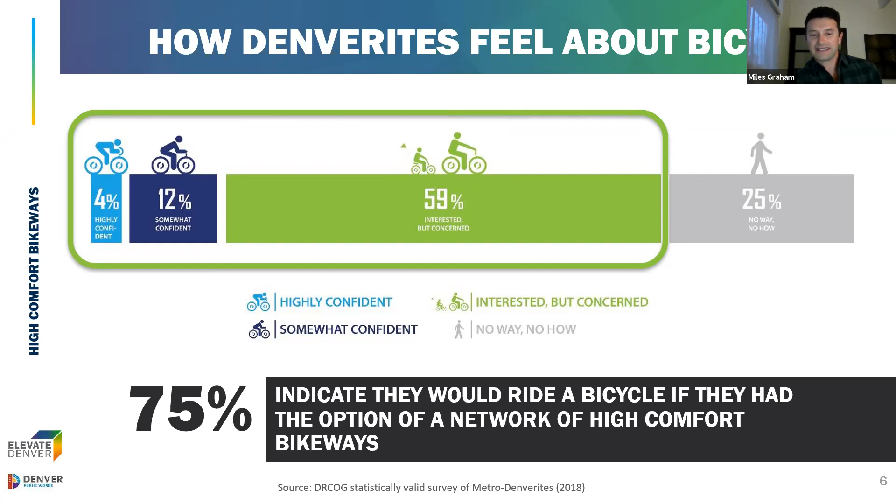Let's take a look at a bit of the why and how these types of facilities prevent risky situations that create conflicts between cyclists and other modes of transportation, particularly dooring issues and conflicts as folks are turning and parking their vehicles, providing a separated space for all roadway users that balances the right of way for folks driving, riding bikes, taking transit, walking and rolling. The benefits translate to safety, comfort, increased utilization of those facilities, and allowing people the option to have choice in how they travel the city.

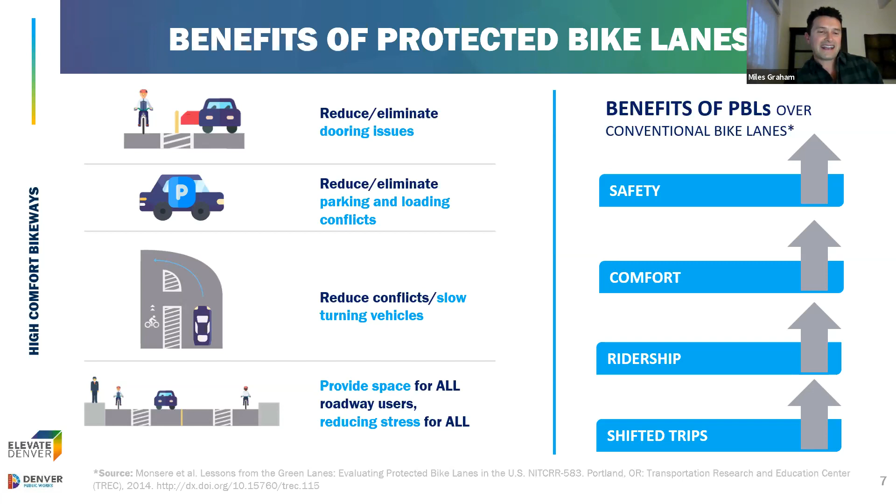Let's take a look at what we heard from the community, how it informed the design process, and how it was integrated into the final design you're going to see tonight. Throughout our conversations with the community, we heard that a concrete curb was the preferred buffer type for the parking protected bikeway, and that was the number one mobility benefit identified by the community. So in the final design, you're going to see it's a parking protected concrete curb facility.

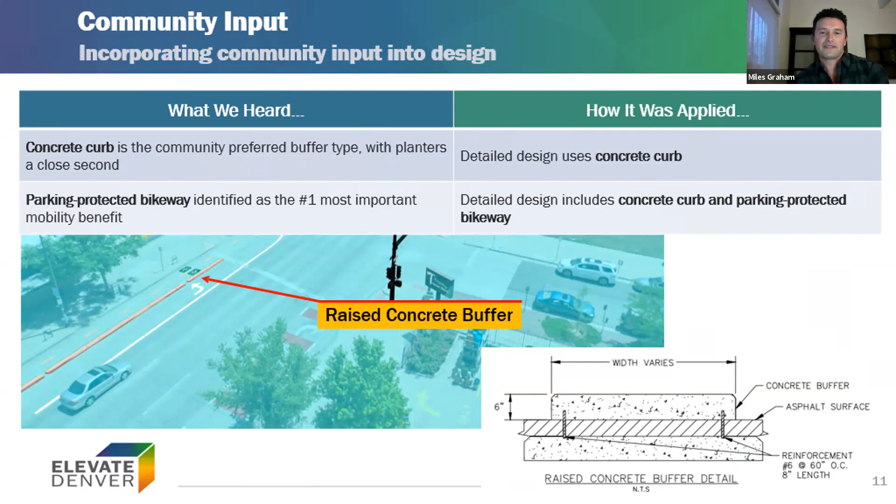We asked how the community wanted to connect to the Cherry Creek Trail, making that connection into really the bike super highway through Denver down Cherry Creek Trail and along Speer Boulevard. The community indicated a preference for connecting to Cherry Creek Trail from the Broadway Bikeway through the plaza on the south side of Cherry Creek, and that's what the design you'll see tonight will show.

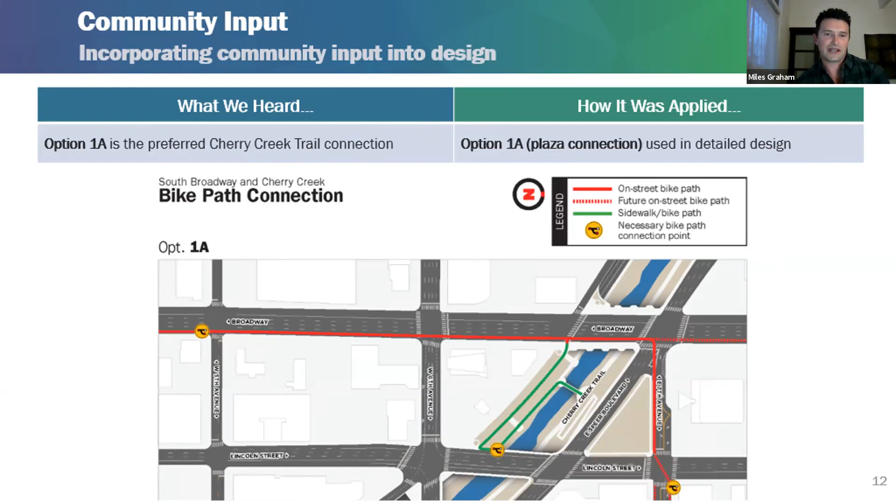Safety was a key priority for this project. In the final design, you'll see intersections that have more visibility and are opened up to improve safety. You'll also see design features like the hardened center line shown here that create a slower, more controlled turning movement, prioritizing safety for folks in the crosswalk.

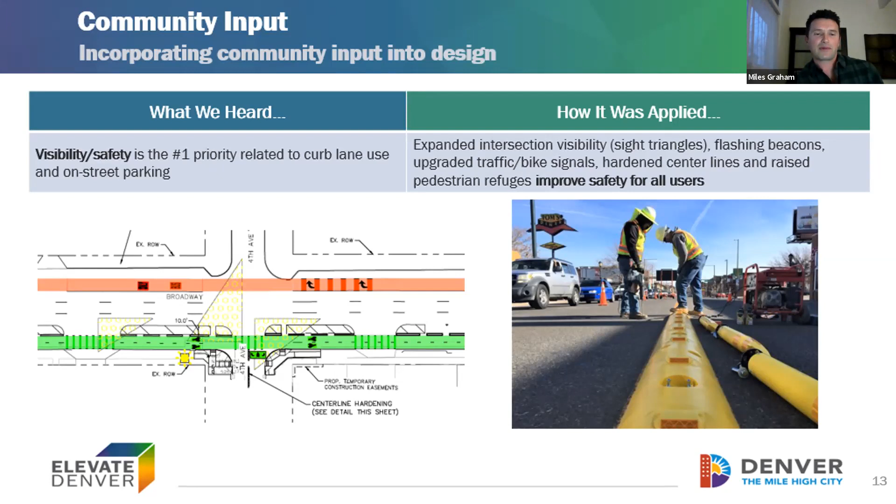You'll also see a pedestrian refuge that prioritizes safety and effectively shortens the crossing distance of Broadway. In current conditions, crossing the entire lane of Broadway can be an uncomfortable experience. With the new design, you'll be able to cross the bikeway and the parking lane, then pause before completing your journey across Broadway, making for a much shorter, more comfortable distance for all pedestrians, especially those who are differently abled.

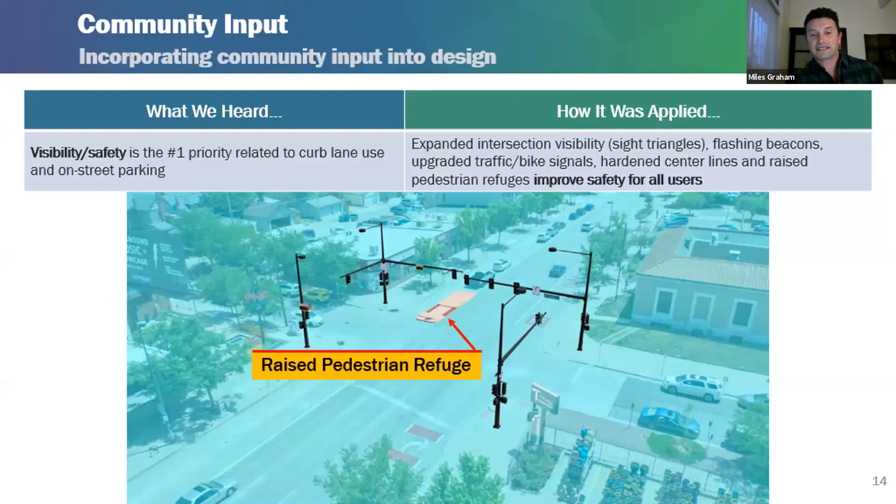All of the intersections will be reconstructed to make them fully accessible and improve accessibility for all pedestrians.

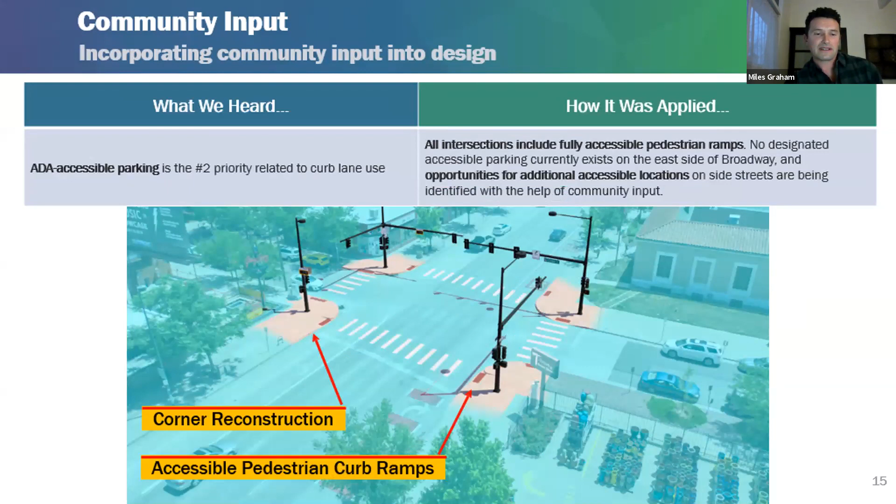We also heard that bike signals were very important, and upgrading all of the traffic signals throughout the corridor will ensure a very clear and protected turning movement for folks riding bikes, walking, and driving at all intersections.

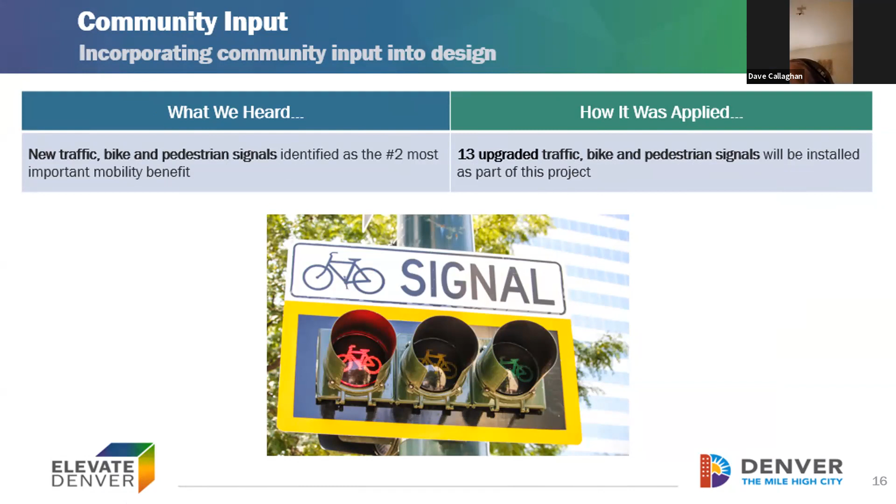You'll see how local access, which was prioritized by the community, is addressed. In future presentations tonight, you'll hear how we connect to Broadway Station, and how east-west connectivity to community transportation network projects will all tie into this facility.

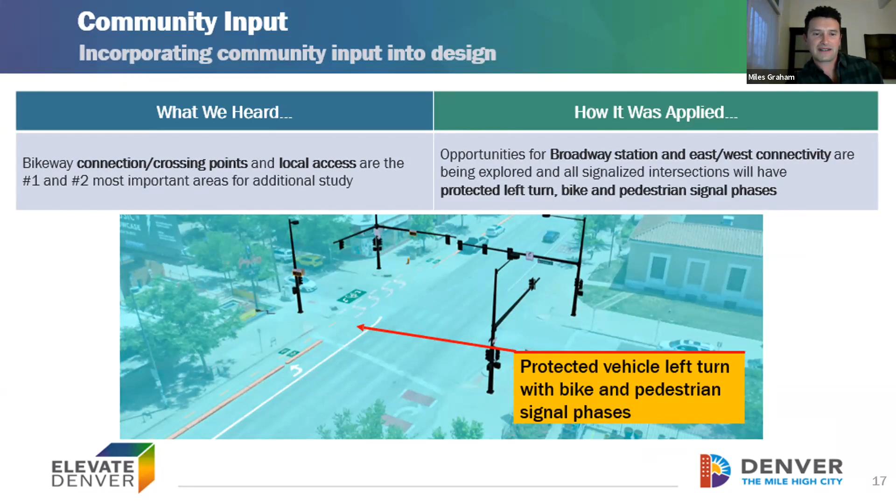On Broadway, protected left turns with those new signals will help make that intersection interaction much safer throughout the corridor.

With that, I'm going to flip it to Matt Ciarkowski to walk us through the design process.

To understand where we're going, it's important to take a quick look back at where we've been. I wanted to do a quick recap of how we've progressed from the conceptual 30% design to where we are today at 90%, approaching final plans.

When we started at 30% design, we were just getting an understanding of the corridor and looking to determine how much space we had and what we could do with it. Our goal at this phase was to determine how we could provide the best, safe, and functional corridor for all of our users.

As we progressed towards 60% design, improvements on the corridor began to take shape as we determined the specific placement and development of key project elements. At the intersections, these included preliminary traffic signal equipment locations, paving improvements like ADA curb ramps, sidewalks, bulb outs, and associated drainage improvements.

Along the corridor, it was determining what the proposed buffer type is and how that would be applied and installed in the field. Looking at curb lane use, it was determining the locations of all the loading zones, where we're looking at on-street parking, and what sight triangles are necessary to analyze to ensure safety for those spaces.

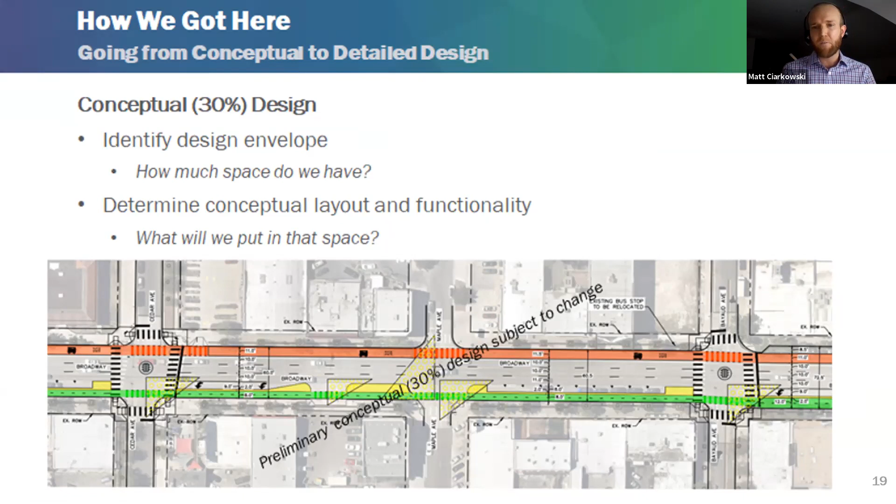As we progressed towards our 90% design, we worked through all the intricate design details of those elements and got them to a point where they're shovel-ready for construction in our plans.

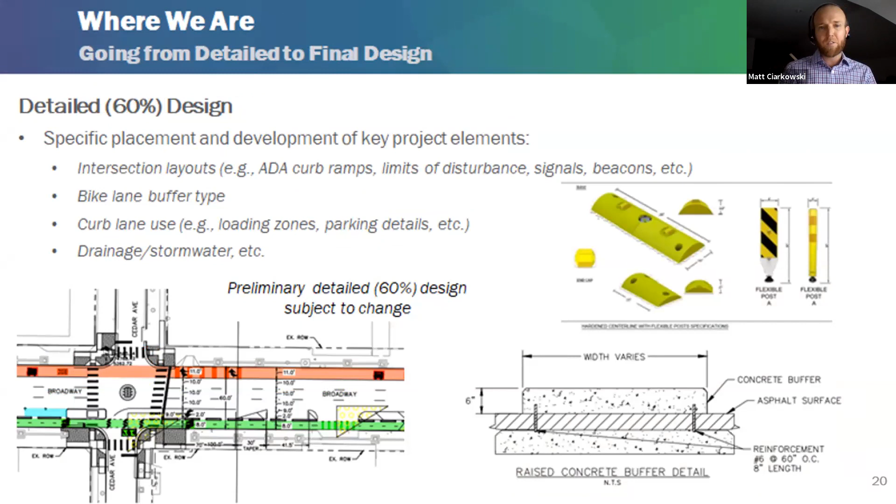From this stage through final submittal, the team will continue coordinating with the city on cost estimates, coordinating with public and private utilities as needed, and preparing for bidding and construction of the project. So let's jump forward to a couple of the key project elements we'd like to highlight.

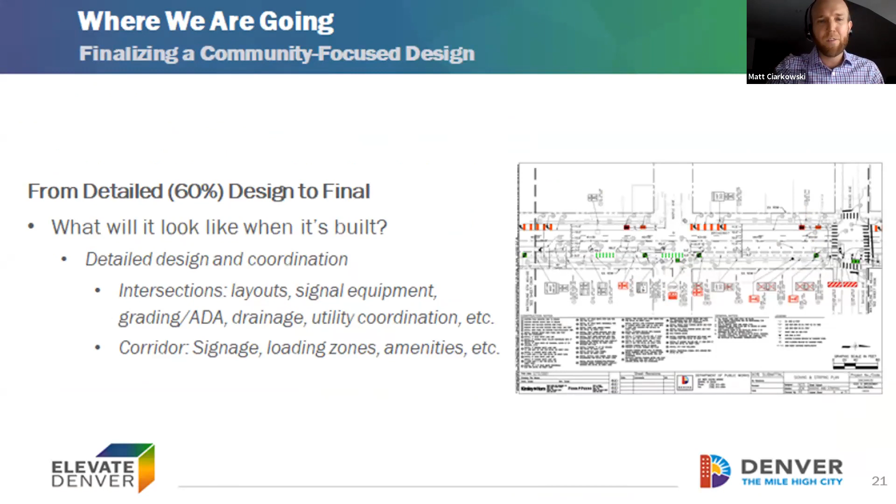As everybody knows, the corridor has a variety of context and land uses, going all the way from Center up to Speer. As we get towards the northern end of the corridor, we wanted to hone in on an area that includes some of Denver's most high-profile transportation facilities: Broadway, Speer, 6th Avenue, and the Cherry Creek Trail.

Our approach in designing this area of the corridor was to provide a safe, comfortable, easy, and intuitive connection for people walking and bicycling along Broadway, while still providing mobility for motorists going through the project area. The existing pedestrian plaza between Broadway and Lincoln will be utilized to provide a connection to the Cherry Creek Trail, as Miles referenced.

On this slide, the orange arrows represent the path that people walking to the trail will take, and the green arrows represent the path for people bicycling, separated by the pedestrian plaza there.

Wanted to also highlight the 7th Avenue connection. 7th Avenue is proposed to be a bicycle facility starting at Broadway and continuing east. The planning and design of this bicycle facility will be completed through a parallel city project called the Community Transportation Networks, which Ellen will speak about shortly. The current concept for 7th Avenue includes a two-way cycle track on the south side of 7th Avenue.

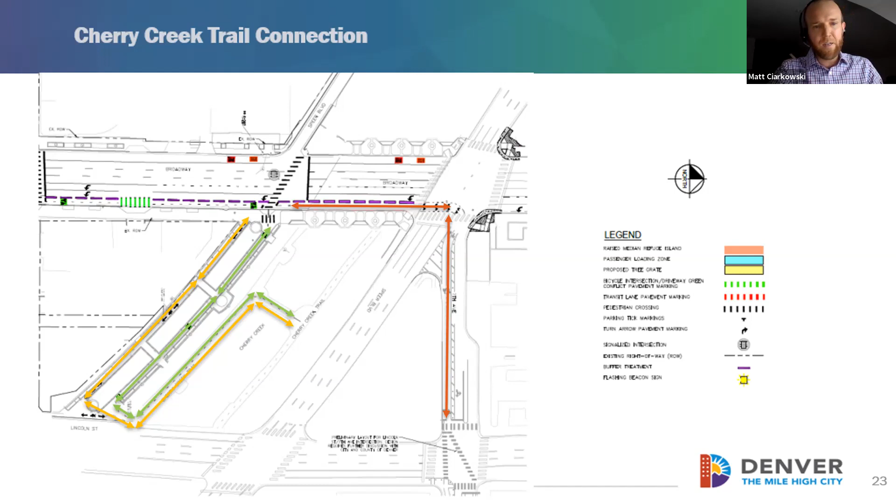This allows us to match the existing configuration of the roadway and maximize traffic flow and operations through the area. So let's jump to the next slide as we go a bit further down the corridor. We're looking here at Ellsworth and Irvington. These intersections are fairly representative of the improvements at the signalized intersections along the corridor. As we talked about earlier, each of these existing signalized intersections will be reconstructed with brand new traffic signals, paving improvements, drainage improvements, and safety improvements as well.

Most of the signalized intersections along the corridor include passenger loading zones. Throughout the project, our team reviewed the locations of all existing on-street parking and loading zones, and coordinated with the city to determine the appropriate locations of these curb uses. The proposed locations are based on safety, the context of the corridor, and an attempt to develop a pattern to help with user expectations looking for loading zones along the corridor.

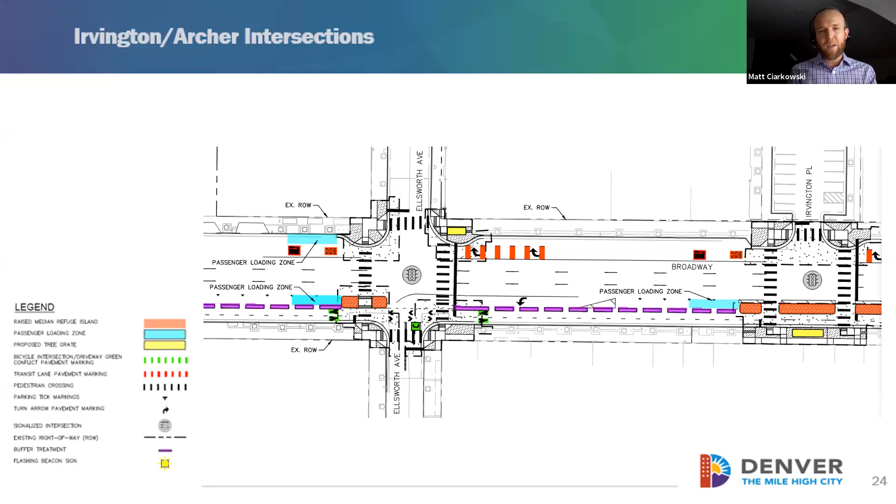The next slide jumps down to our far southern limits of the project at Center Avenue. What I really wanted to highlight here is that our team has been coordinating with our public and private partners at this area, ultimately to provide a connection to the I-25 and Broadway project, and then down to the Broadway station. Mike Harmer will talk about this a bit more in his part of the presentation.

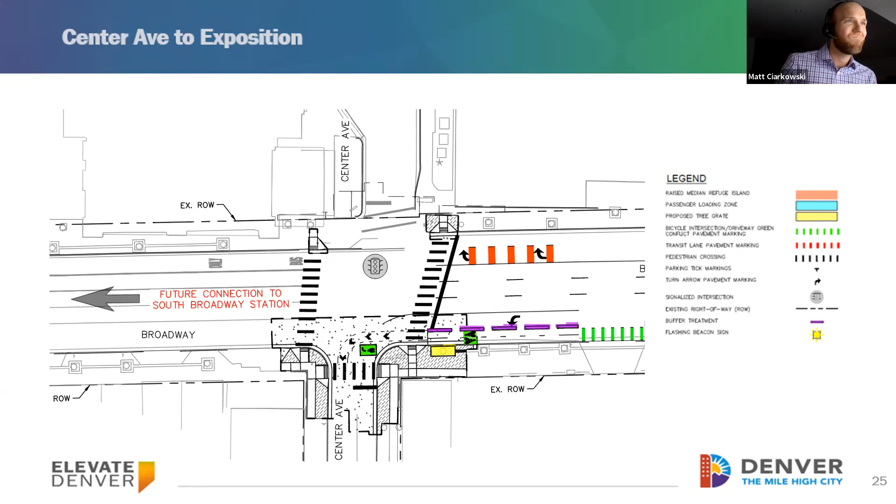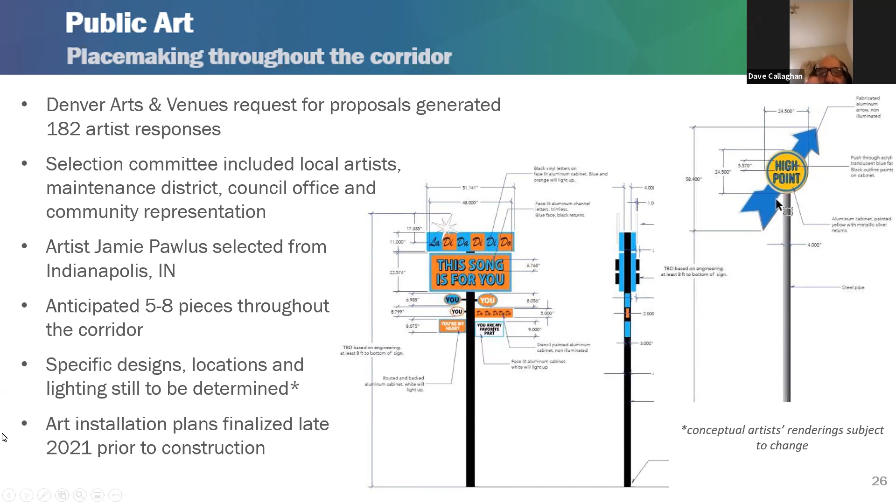Placemaking throughout the South Broadway corridor is going to be primarily through public art installations. Public art for this project is a separate but collaborative effort with our Denver Arts and Venues group, and they're underway, working together to try to time it as best they can with our construction. Obviously, we won't install any art installations until after construction, but we want to plan for it so we can reduce any rework and get any utilities or lighting figured out ahead of time.

We need it installed with South Broadway construction. So they issued an RFP for artists and got a really robust response, with 182 artists responding to the request. We had a committee of local representation that included local artists, two maintenance districts along the project corridor, the local council office, and community representation that selected Jamie Pawlus from Indianapolis, who's known for her whimsical signs, to be the artist for this project.

As far as the number of installations on the project, that's going to depend on final budget numbers and things like that. But we're anticipating somewhere between 5 and 8 different installations throughout the corridor. We're going to be working with arts and venues and the artists to find the most appropriate and safe locations along the corridor, making sure they're placed thoughtfully so they'll be highly visible and enhance the placemaking and public space for those using the corridor.

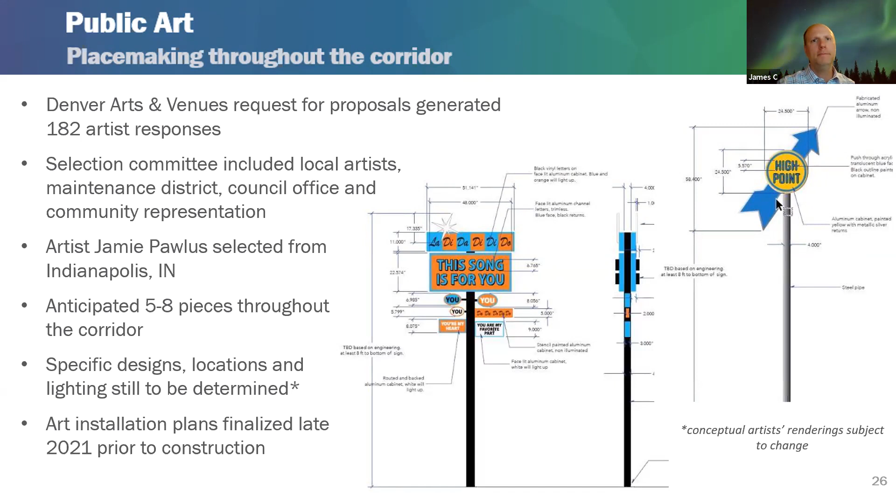Next slide. So where are we going, right? Some people mentioned before, we've been looking at this corridor for quite some time, since as early as 2015, which included our early test bikeway along Broadway. We used that to gather data and inform the programs moving forward.

Essentially that's a concept of two different programs for Broadway. First, a north segment, which would be a protected bike lane from Speer up to Civic Center Station. That project is still in the concept stage of design, and it's waiting for funding to finalize design and ultimately implement the project.

The south segment, which is the project we've been talking about, the South Broadway multimodal project, we're closing in on the final design phase right now. We anticipate having our final designs wrapped up by mid-year, in summertime. After that, we'll begin what we call our pre-construction efforts.

Pre-construction efforts essentially involve right-of-way or land acquisition, which for this project consists of acquiring temporary easements to make sidewalk and ADA connections. Broadway is an older corridor, so the land ownership isn't a pretty straight line — it jumps around a lot, so we have to get small little areas and permission to provide a smooth transition and smooth construction for our sidewalk and ADA work.

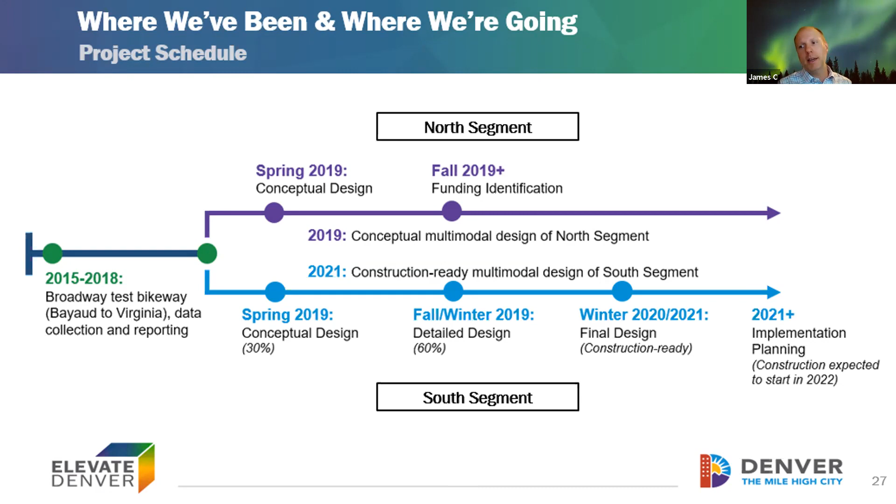Once we wrap up the pre-construction efforts, we'll go into actual construction, which we anticipate kicking off in 2022. Next slide.

If you want more information about the project, we have a project website, and we've got a bit.ly link that makes it easier for you. If you have any specific questions you might think of later or would like to ask, you can email us at denvermovesbroadway@denvergov.org, and somebody from the project team will respond to you. And with that, next slide.

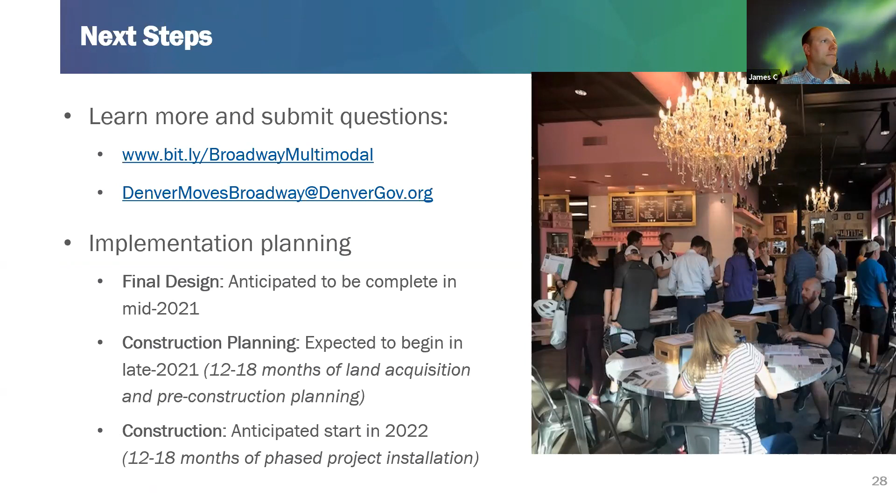We have any, now we have some. Now we're opening it up to questions, and it's 5:55 — look at that, right on the dot. That is pretty amazing. Thank you. Thank you for Broadway. So we do have tons of questions. Thank you so much for asking them. I'm going to try to hit as many as we can. Obviously we are a little bit limited at the beginning.

So several questions about the alignment, going back to the original concept design. Thankfully we have Brett here, who was also part of the design team prior to James — James is on the build side of things, Brett is on design. Larissa asked about the Broadway bike lane: why is there a two-way bikeway on a one-way street with opposing traffic, and a parked row of cars? Similarly, Rover Greer asked why not put this facility on Sherman instead. So I guess they're asking generally how Broadway was identified for this type of facility, and what is so unique about Broadway's protected bikeway that makes it the best fit. Brett, if you don't mind, or maybe somebody from Miles or the team can answer.

Sure, I'll just say first off, the protection that's going in on Broadway is probably our highest level of protection and PBL, having, as was mentioned earlier, the concrete buffer with the parking on the other side. It provides a significant buffer from that traffic.

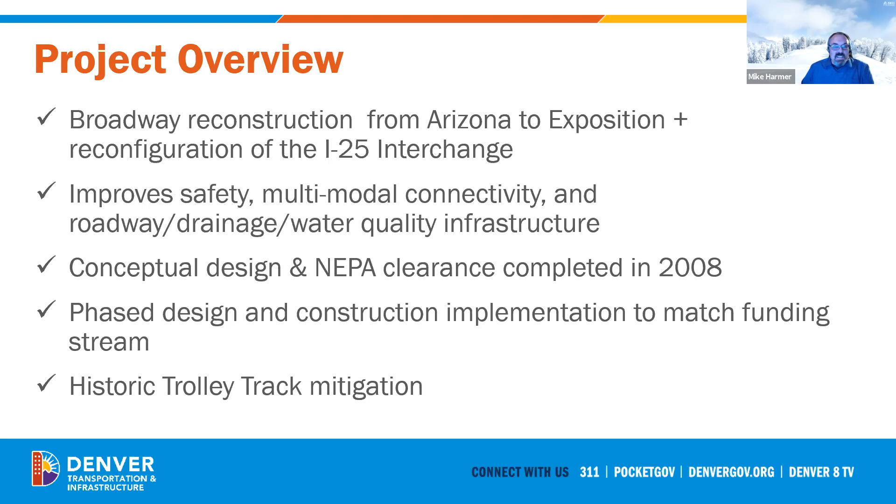With the implementation of the project, you probably heard it started back in 2008 - oh, that's a long time. Due to funding constraints, the city has been chipping away at this project for a number of years, but it's a phased implementation. Later in the presentation, you'll see a trolley track mitigation and interpretation element we're incorporating into the project.

Our goal here is to further work towards the city's goal of reducing deaths and serious injuries to zero by 2030. We're doing that by reconfiguring some of these high crash intersections, rehabilitating and improving sidewalks, upgrading curb ramps to meet ADA criteria, adding shared use paths for both bikes and peds, and finally extending the Broadway protected bikeway from Center to Exposition to connect into the network we'll be providing as part of this project.

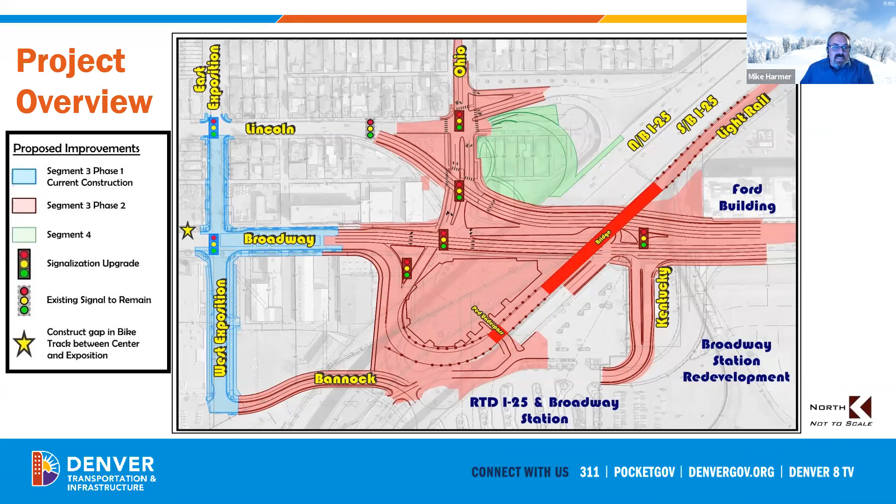With that, we're reconstructing a couple of different accesses. On the north side, that'll be via Exposition and then the Bannock leg. Second, we're consolidating Kentucky with the off-ramp intersection to eliminate one of the signals that's there that causes a lot of accidents.

The result of that is a number of different points that the public can use to access the station. On the southern end of the project, once the redevelopment of the former Gates site comes online, there will also be another connection via Market Street or Marketplace, that'll carry people through that development down to about Tennessee, where they can cross Broadway and connect to a regional trail.

This is a schedule that illustrates where we've been and where we're going. As I mentioned before, the EA was completed back in 2008. Then we moved on and completed segment 1 and segment 2 of the project, which was Broadway from Kentucky to Arizona and the Mississippi stretch.

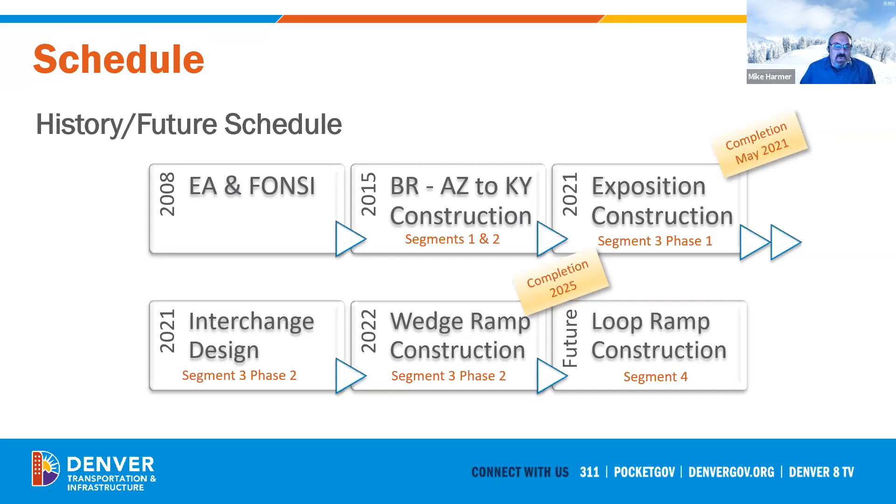Earlier this year, we awarded the Exposition Avenue construction, which is due to be done in May. This year, we plan on finishing up the design of the salmon color, or the interchange area, and we anticipate construction to occur sometime in 2022, with an anticipated completion in 2025.

Here are just a few pictures of the construction that's ongoing right now. These are pictures of East Exposition between Broadway and Lincoln. It shows pictures of the roadway reconstruction - it's gone from asphalt to concrete. We've also reconstructed a number of the sidewalks and pedestrian ramps in the area.

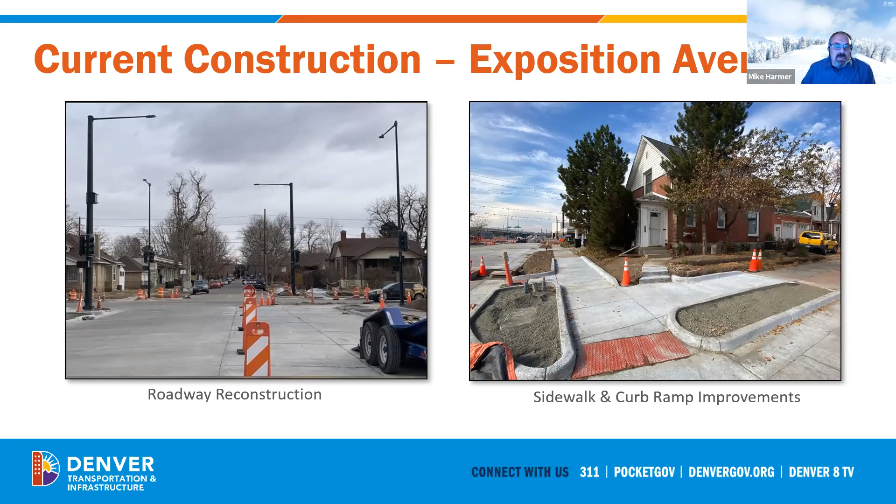The project is constructing storm sewer infrastructure, putting in new signals at both the Broadway and Lincoln intersections with Exposition, and installing some street side stormwater planters to improve water quality.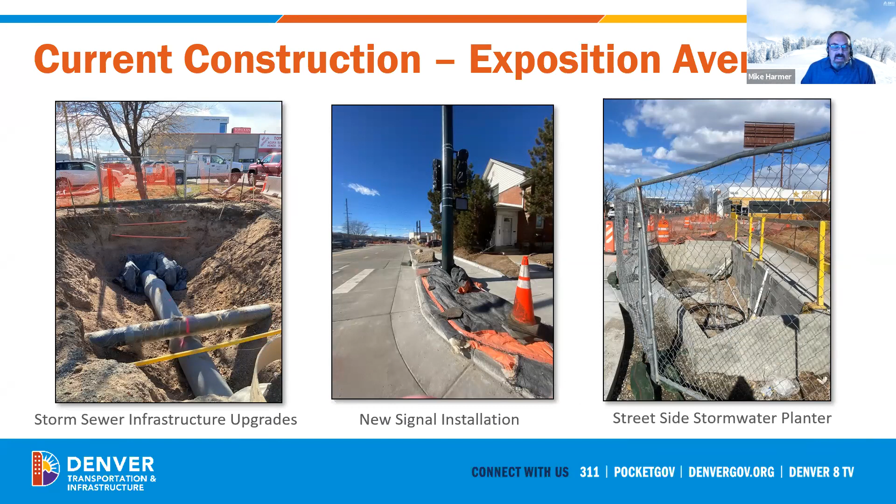What really isn't shown clear on here are the multitude of pedestrian and bike paths that we're providing with the project.

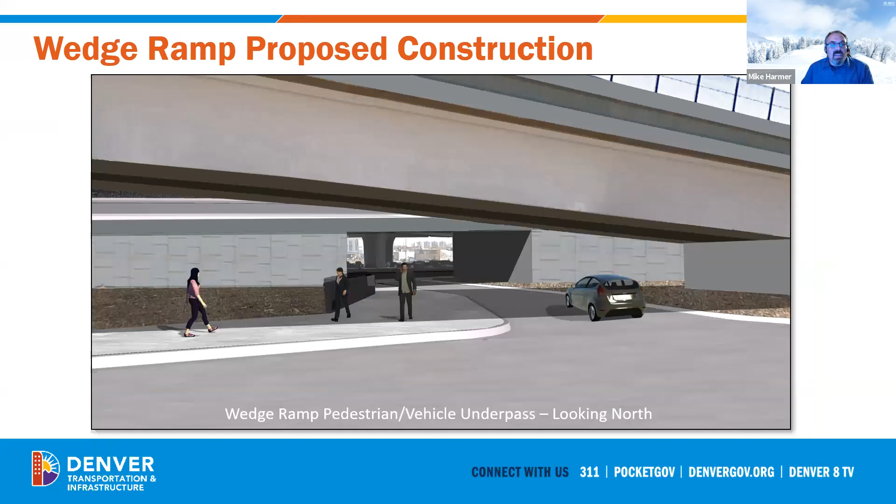The next slide will show the view from the other direction.

I mentioned briefly that one of the things we're doing as part of the project is installing a historic mitigation element, incorporating that into the project. This element has to give site-specific references to the transportation history of the corridor, and incorporate that into a higher traffic area that will engage people more than just a sign.

Many of you have probably been at the Broadway and I-25 station. On the southern end of the platform, there is an existing sign that characterizes some historic items, and I'm not sure that gets a whole lot of attention anymore.

So what are we planning on doing? What's presented here is the site concept. The plan is, at the intersection of a couple of the wider walkways, to install a textured sidewalk that inlays brick pavers to mimic the old trolley lines. That's what you see by these lines in the center of the sidewalk.

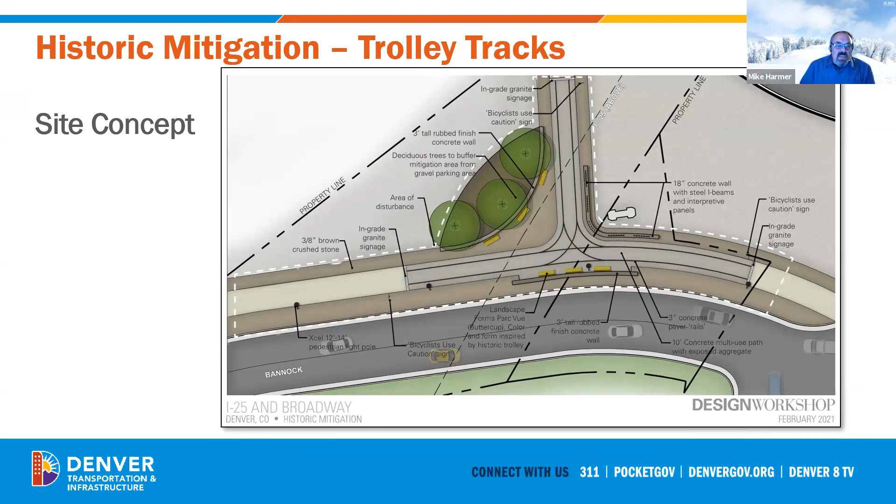Let's go to the next slide, which will give you more of a 3D rendering of what that is anticipated to look like. It will include interpretive signage discussing the relevance of the historic trolley, not just the tracks, how they contributed to the area, how they moved people and goods around, and how it provided access to the former Gates rubber plant site a long time ago.

It'll look like more of a plaza area where people can sit and congregate. There's benches, small walls, and additional pedestrian scale lighting for safety. So that's what we're planning on moving forward with in the design.

This is another rendering, more of a close-up view of some of the signs, the interpretive elements. Largely they're panels on top of I-beams with nearby seating.

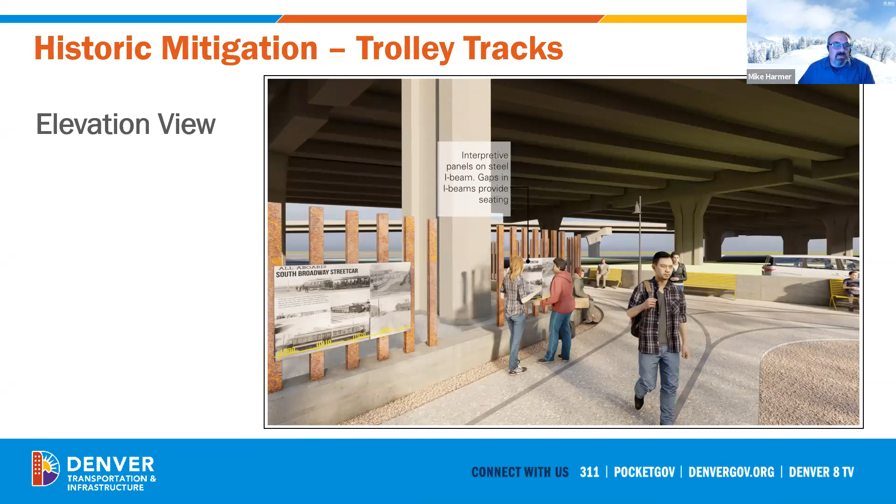So with that, I thought I'd see if you guys have any questions. I think I'm just under my time - there you go. Look at this, I am loving this team. We were a little concerned that we were not going to have enough time.

Yes Mr. Mike, we do have several questions for you. First, from John: what is the total price tag on the interchange project? The total cost of the interchange, given that it's a phased implementation, is hard to give a specific number. As mentioned before, construction of the entire project began basically in 2015. Overall, it's probably in the range of $100 million.

That obviously includes local funding, state, and federal funding, correct? That is correct. The city has been successful in obtaining a number of grants through DRCOG. Those monies come from FHWA in terms of a federal grant. Those grants are project specific and were awarded based upon a competitive process.

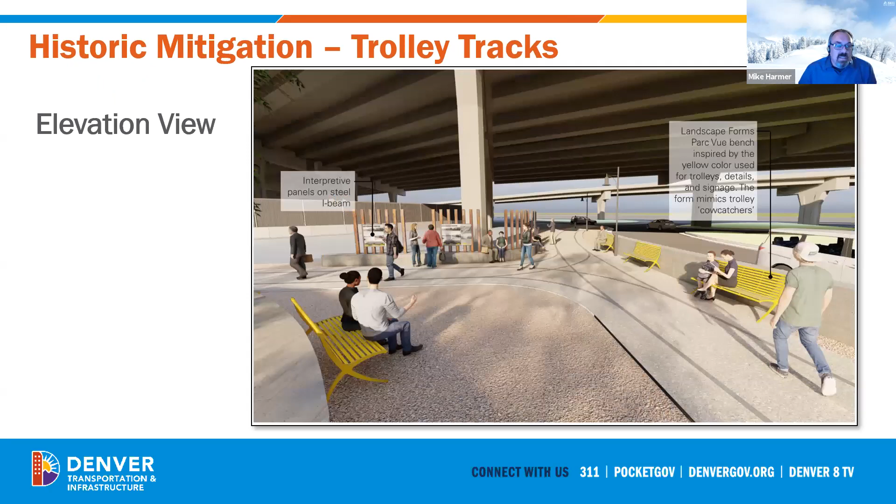If we don't mind going back a few slides, so we can show... Yeah, it's probably back about five slides, one of the maps, the overall map. That one, right? Yeah, that is it. This is an area that's still under development. What you see here are the improvements largely associated with the Salmon Color project, or phase 2. We do plan on widening the facilities on the north side of Ohio.

Once the final phase of the project comes in, you'll see even more connectivity for bikes and pedestrians. One of the things we're doing at this location, as many of you probably know, is that the existing Ohio and Lincoln intersection is currently unsignalized. We're putting in a signal which will make it safer and easier for peds and bikes to cross.

But this intersection will continue to evolve over time. In this slide, there's a lot of discussion, as expected, about the green area, segment 4 - that's the 800 block. Can you share with everybody the status of segment 4? And go over what the original EA called for in segment 4, and the general status, Mike.

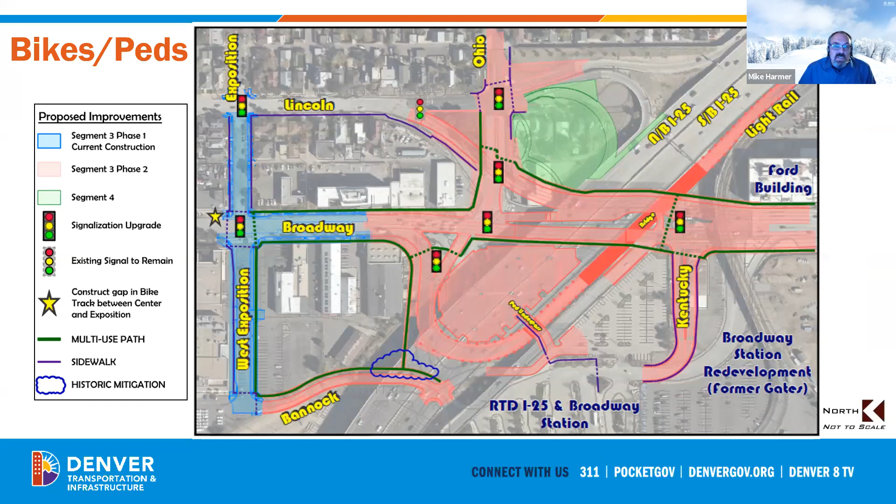We certainly still have questions and comments in the chat, but let's kick it off now to our Lincoln Transit team, so folks can see how these improvements help transit on the other side. Brett and Zack, if you don't mind taking it over.

Sure, I'll kick it off and Brett will come in at various points throughout the presentation. So this project - the boundary of this project is shown here on the map. It's from Ohio to about Speer or 6th, shown to 7th here. That's where the bus lanes merge in, or become the 24-hour bus lanes that are present north of Speer, out of Speer Boulevard. So that's the bounds of this project on Lincoln.

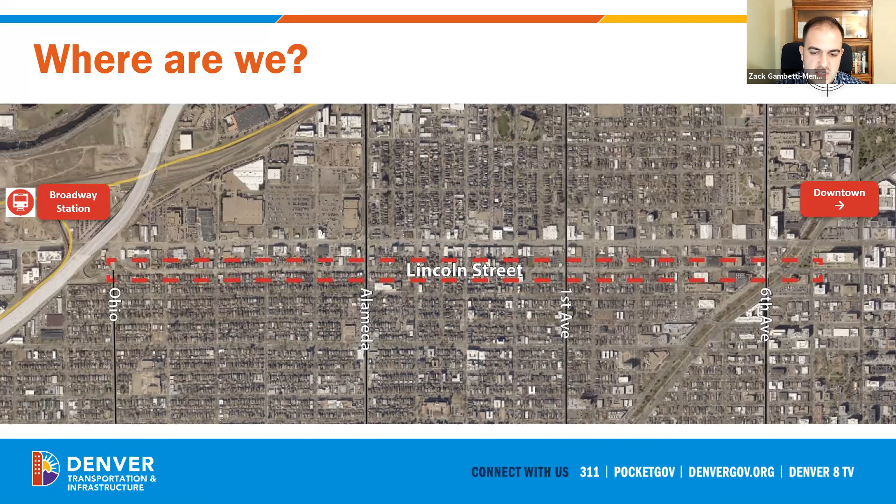Next slide, please. These next few slides just set the stage for where the project has been, and also set the stage for how the proposal - excuse me, I'm stumbling over my words.

How the proposed alternative came to be based on these factors. We heard a lot from the community about there being safety issues on the corridor. It doesn't feel safe to walk along Lincoln. Cars are going super fast.

This is just an image of the crashes along the corridor. This represents hundreds of crashes over the last couple of years. It's only a data point, but we have a lot more data from you all, plus speed data, that shows this is a dangerous corridor. Additionally, Lincoln north of Alameda is on our high injury network, so it's one of the 5% of streets in Denver that has over 50% of our traffic injuries and deaths.

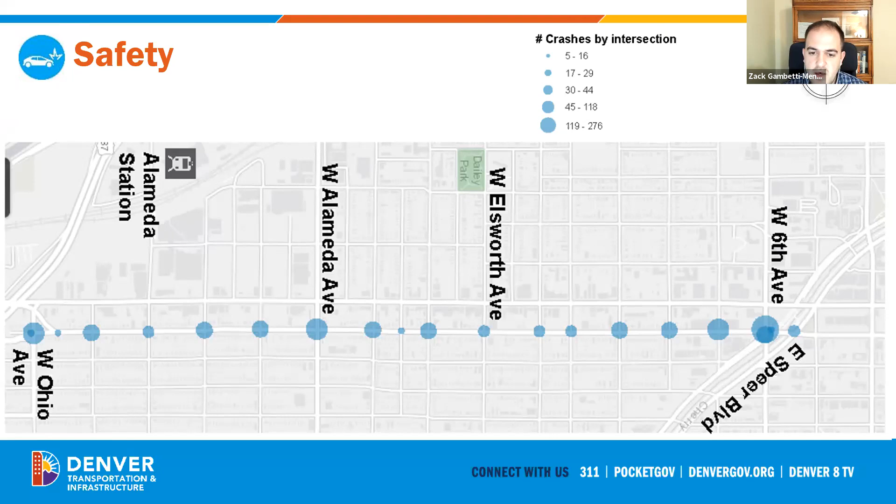Transit along this corridor: Lincoln and Broadway act as one corridor since they're both one-ways. It's the third most used transit corridor in Denver. This may remain true today, I don't know if it's still third, but it may potentially be, because I don't know if anyone has ridden the Zero lately. There's a lot of folks on it, so much so that I think this is one of the corridors RTD has actually been increasing service on through COVID.

They've also brought the larger articulated buses to serve the demand along this corridor. So even now, when we're hearing that transit service is down, this corridor is still moving quite a good number of people. And the important thing on this slide too is the delays the buses are seeing - upwards of 35% of their time along this stretch of Lincoln is spent stuck in congestion. That's primarily in those afternoon rush hours when the bus-only lanes are not active.

This slide will come into play when we talk about what we're doing on the corridor, but the main takeaway is just to notice this is the vehicle traffic along the corridor - very peaky. You see these spikes in the morning rush hour period and afternoon rush hour period throughout the week. Saturday is kind of just a blob of traffic throughout the day, as is Sunday, but not as high. Those peaks are really key because that's when the buses are getting stuck.

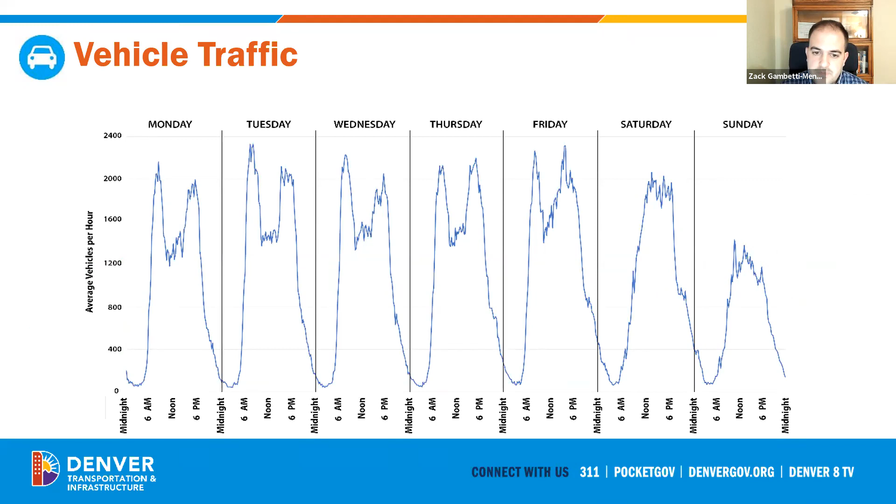Existing conditions with parking, and this will come back at the end - currently there's no spaces on the west side. There's approximately 247 spaces on the east side of the street between Ohio and 6th Avenue, available 22 hours a day on weekdays, 24 hours a day on weekends. The only time you're not allowed to park there is 7 a.m. to 9 a.m. when the bus-only lane is active.

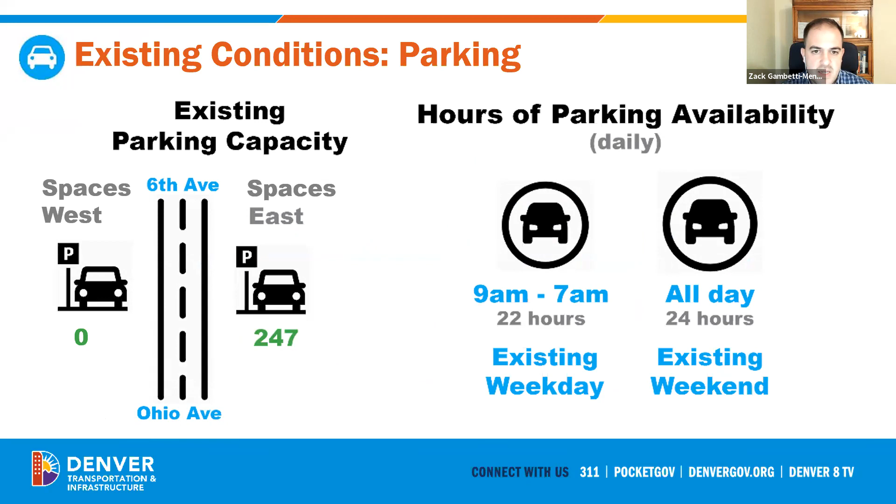So what did we do with all of that information and all of the community input we received? We'll start with talking about the safety improvements coming to the corridor, and Brett will go over those, and then I'll talk about how the street operation is changing and how that impacts transit, traffic, and parking.

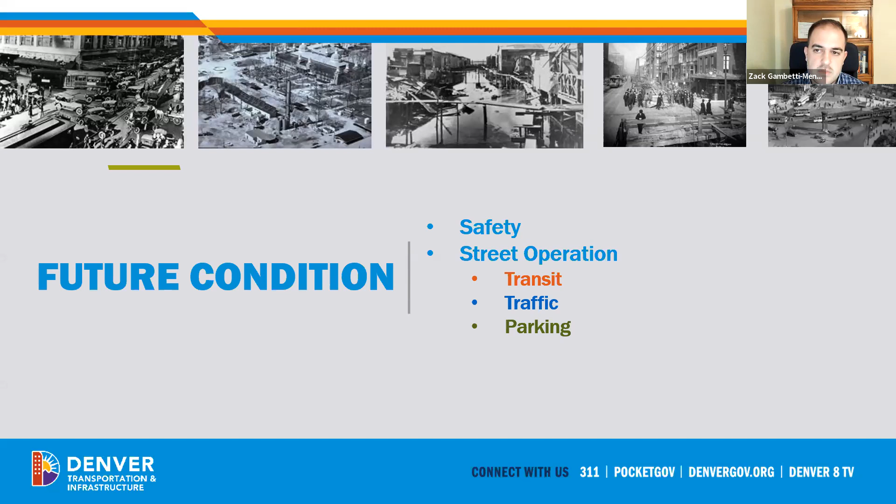Thanks, Zach. As Zach mentioned, we took the opportunity to evaluate and design some lower cost Vision Zero improvements that could be installed with the transit improvements, which Zach will talk about in a moment. These improvements were determined as a direct result of our crash data analysis, a Vision Zero walk audit that the team conducted, and the community feedback we heard from you all.

As a reminder, the public input we received really highlighted the speeding vehicles seen along Lincoln, which leads to that highway feel through the neighborhood that we've heard a lot about. We also heard that it feels dangerous to walk along and across Lincoln due to those high speeds and the close sidewalk proximity to speeding vehicles.

So I want to get into the details of some of those projects that will improve safety along the corridor. They're in 9 general categories of improvement that I'll whip through decently quick - I apologize, it's going to get a little technical, but we get really excited about these things, so hopefully this will give a good understanding of what we're doing.

Firstly, we have 2 traffic signals being installed along the corridor beginning this year, at the Exposition and 5th Avenue intersections. These will include updated signal infrastructure, safe pedestrian crossings, and better visibility for all modes.

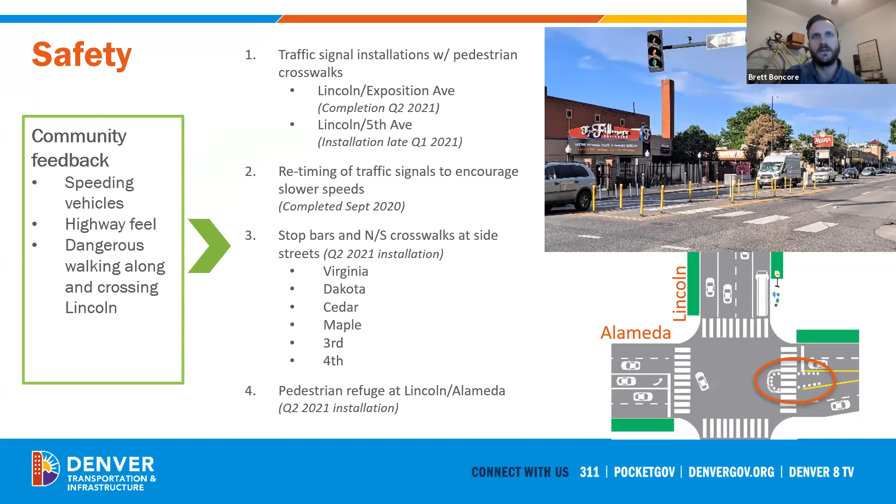At 3 locations on the corridor, we saw a need for daylighting, which means removing some parking spots near the corners to better establish visibility for all intersection users, whether turning or crossing motorists, people walking, biking, or rolling. In some cases this allows more space for motorist turning movements, like at Cedar Avenue, where we're daylighting the intersection to provide more space for the RTD Route 3 to make its left turn.

There are 4 intersections along the corridor where we saw current or developing bike and pedestrian safety issues. At Dakota and 4th Ave, we're actually evaluating traffic signals long term, and we'll be installing painted bulb outs to encourage slower turning speeds and improve safety for all users. An example is shown in the photo on the top right - this is also a Vision Zero project we did on Colfax recently.

At 2 of these locations, Virginia and Ellsworth, we'll be installing painted bulb outs and hardened center lines. These hardened center lines, shown at the bottom, are from a photo in New York. They further encourage slower left turns and help mitigate pedestrian and bike versus left turn motorist crashes. Some of these will also be installed on the Broadway cycle track.

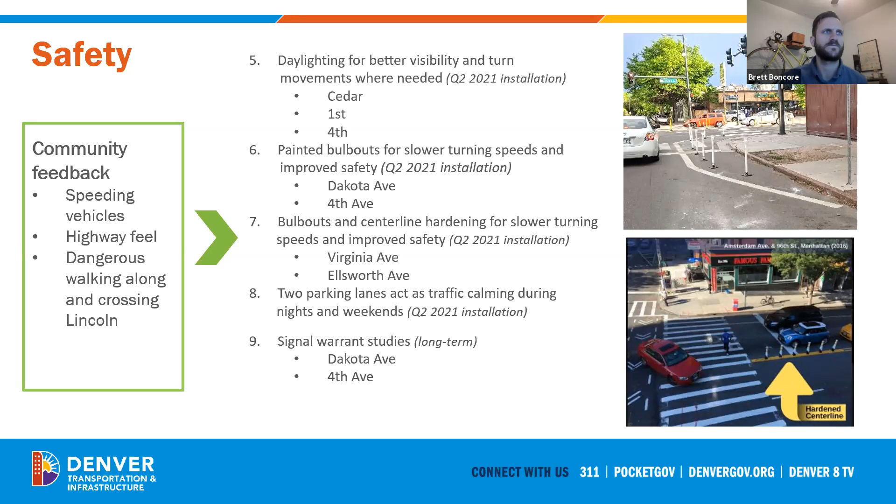I'll turn it back over to Zach to chat more about the street operations. Thanks, Brett. So now we'll talk through the street operations, the changes coming for transit, traffic, and parking. We wanted to lead with safety because that was the biggest piece we heard during our community feedback. This started with needing to get the buses unstuck in those afternoon periods, but we were able to incorporate a lot of safety improvements that I think will be a great addition to this project.

But now for these other pieces of the project, I'll show some of the community feedback we heard, how we turned those into solutions, bringing in the data we talked about earlier, and then we'll walk through what the corridor will look like during the day.

In terms of transit, we heard a dichotomy: we don't need a 24-hour bus lane. Most folks who said that still understood the need for expanding the bus-only lane hours, suggesting peak only or just the middle of the day. There were almost an equal number of folks wanting a 24-hour bus lane, feeling it was needed on Lincoln just like it currently is on Broadway. But there was pretty clear consensus that it not be a 7-day condition.

When we started this outreach, we were just presenting ideas as 7-day conditions. Based on this feedback, we're now doing a peak hour bus only lane, from 6 a.m. to 9 a.m., in line with what currently occurs on the corridor, and then again from 3 p.m. to 7 p.m., when we see the biggest delay in the afternoon peak. It will be weekdays only -- traffic conditions and service levels didn't warrant blocking that easternmost lane for buses only on weekends.

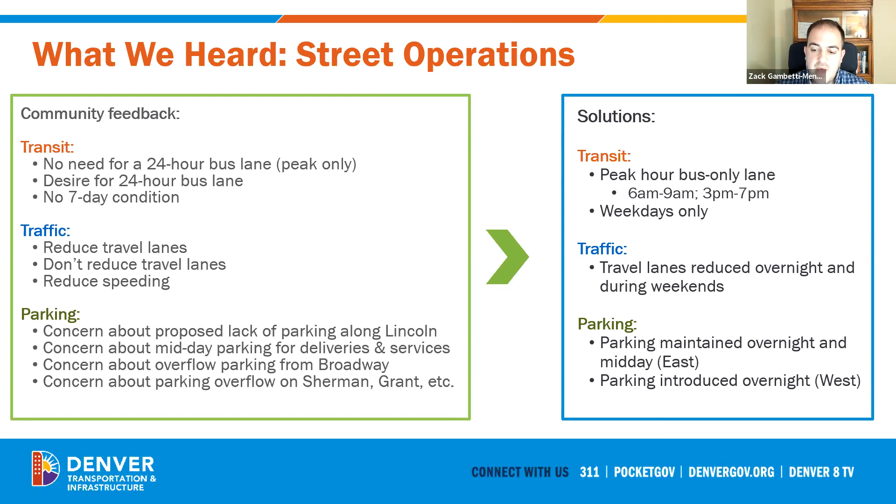We're also going to introduce parking on the west side overnight. That's where the visual narrowing comes in during those overnight conditions and over the weekends, to have that buffer and reduce the crossing distance when there's parking on both sides.

Next slide. So now this is how the street will operate through the day. The solutions on the right-hand side of the screen are the same that we just walked through. In the AM peak period, 6 a.m. to 9 a.m., this is how the corridor currently functions: 3 drive lanes and a bus only lane.

Once 9 a.m. hits, next slide please, that bus only lane turns into a parking lane -- the same condition you're all pretty familiar with currently on the corridor. Through the midday period, once 3 p.m. hits, next slide, that parking lane becomes a bus only lane again. We'll have right-of-way enforcement clear any cars parked there so the buses can start moving at 3 p.m.

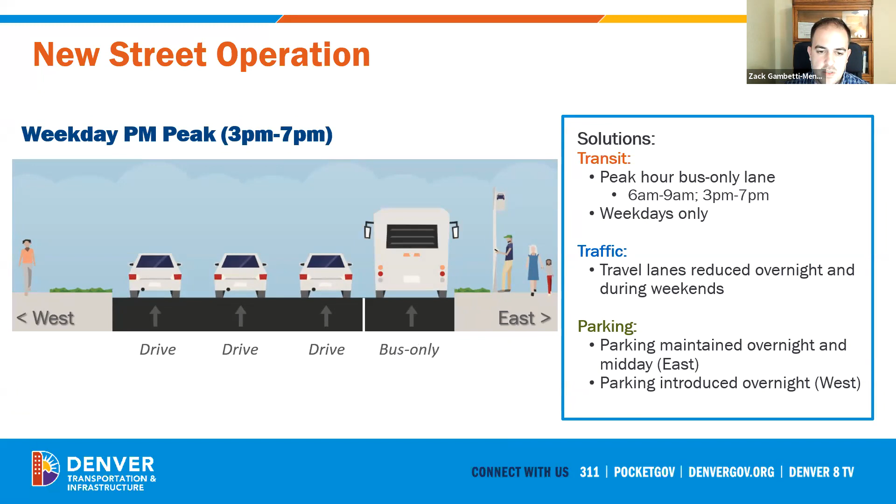Next slide. Overnight, you see both lanes on both ends switch back and forth. So that drive lane on the west side going forward turns into a parking lane, as does that east side bus lane. So then there's 2 drive lanes in the middle, with a buffer of parking on either side.

And that condition remains the same over the weekends as well. The weekend condition would begin at 7 p.m. on Friday when the bus lane ends, through 6 a.m. Monday morning when the bus lane starts again.

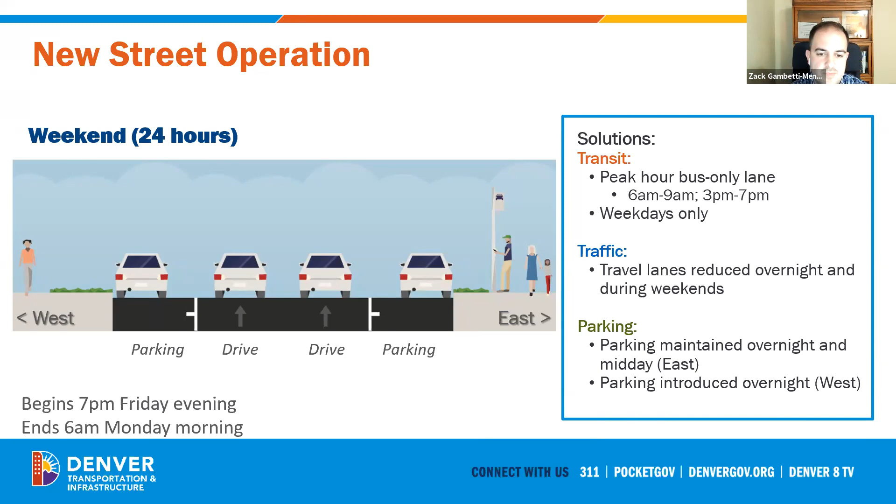So what does all this do? It increases our transit-only lane hours by 250%, from 10 hours to 35 hours, getting those buses through in their most congested periods. And it does add parking to the corridor, which many folks were concerned about - about a 92% increase in parking. There's just a few less spaces available on that west side than there currently are on the east side. To Brett's conversation about safety earlier, I think 11 intersections are improved, so that's pretty great.

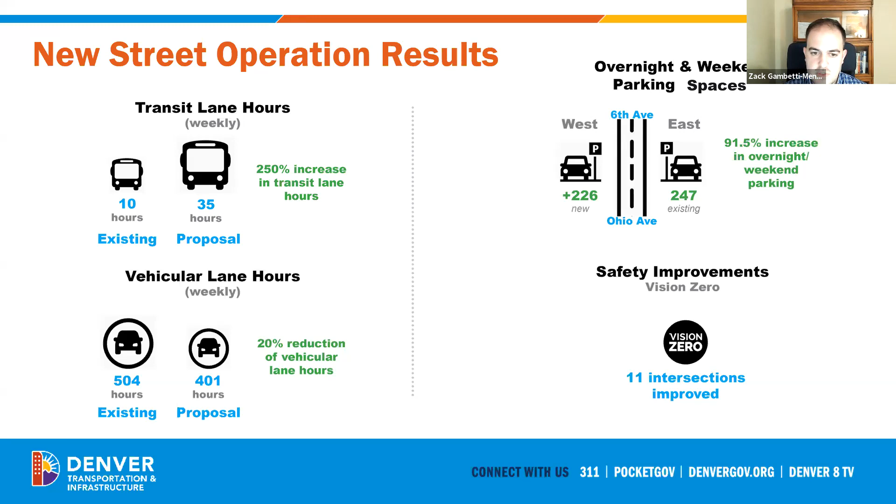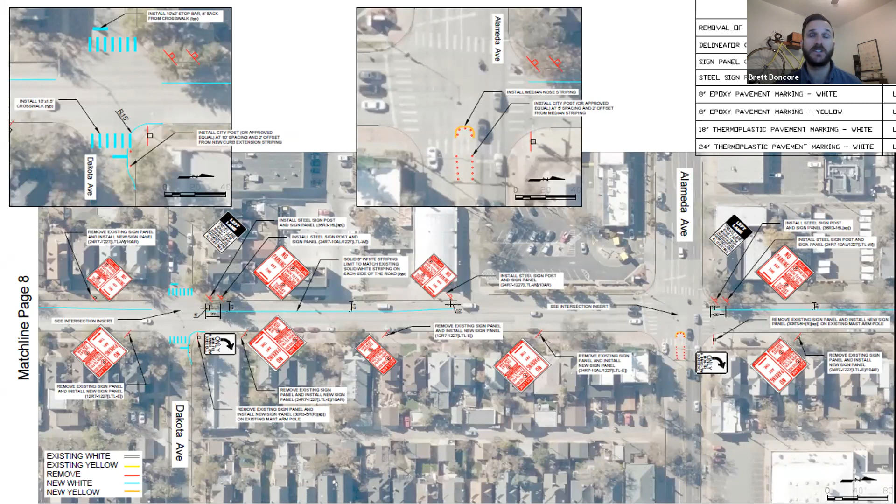Oh Brett, this is you. Yeah, so this slide, you don't worry about reading this slide, it's a little detailed - this is the nitty-gritty detailed design. I have this up here just to say we're in the home stretch. Detailed design has been done, which we used in-house staff to do, a little uncommon for these types of projects. But we've wrapped that up, and we're now procuring construction. Definitely pleased to report that.

We can go to the next slide. That kind of shows a timeline of where we've been and where we are. Zach went through a lot of this, so yeah, we're in the implementation phase. Right now we're moving this forward to construction.

We are literally in the process of contracting or procuring a contractor to make this happen. So we're thinking, depending on weather and some nitty-gritty administrative stuff in the background, spring or summer of this year is when we'll be constructing this.

Those of you who live along the corridor should have probably already started seeing construction notifications. During construction, you can expect some minor disruption in travel near the construction zone, but these disruptions will be communicated beforehand to make sure everyone's aware of that.

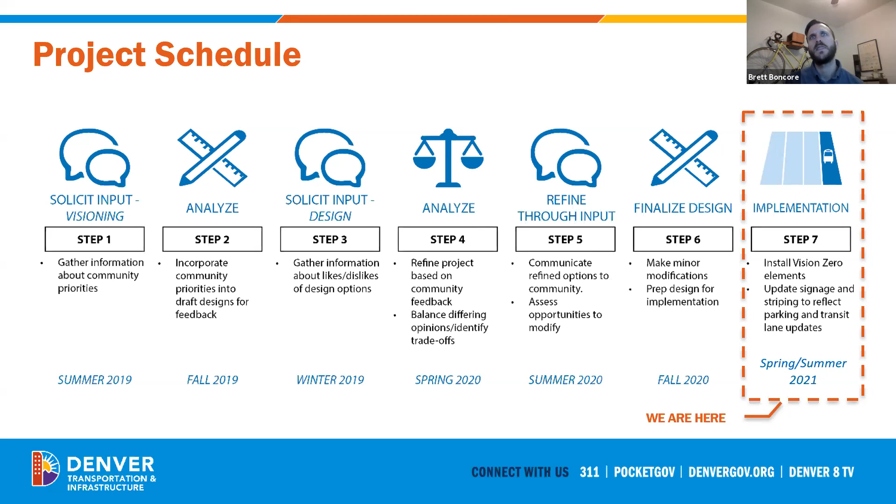Okay, will there be transit signal priority along the corridor, Brett or Zach? No, not with this project. Currently the signals are pre-timed, and the cycles come, I believe, every 90 seconds. So no, not at this time. Yeah, not at this time with this one.

We had a lot of discussion on the chat regarding adding the on-street parking during those off-peaks, when there's a lot of desire out there by the community to prioritize transit, bicycles, and pedestrians over cars. This relates to two projects - on the Broadway protected bikeway side, there's going to be on-street parking impact for the merchants in order to build the bikeway. But on Lincoln, this project is adding capacity during those off-peak, non-peak times, nights and weekends, to provide that friction. Can Brett or Zach go over why we had to keep those 3 travel lanes during the traditional peak periods of vehicle movements?

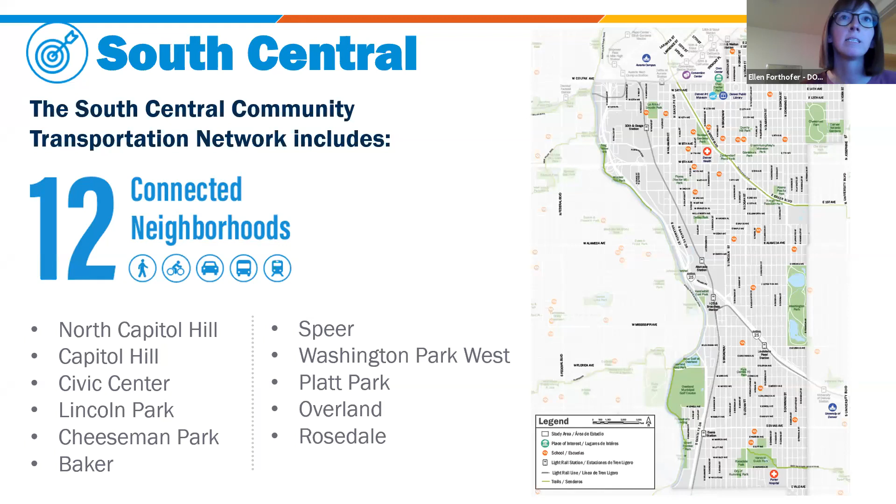On the next slide, I'll talk through the process that these community transportation networks follow. Each project, each corridor within the network goes through each of these benchmarks. There are 5 large benchmarks that each project follows. The first is confirming the bike network - that's where we look at the routing of corridors and understanding if there are potential alternatives, what makes the most sense given public feedback, as well as data analysis.

From there, we develop options and then move into developing a concept design for each corridor. After that, the design goes into a refining process as we finalize and complete the design, then move towards construction and implementation. It's worth noting that because there are so many projects within the South Central area, some corridors are in different places of this planning process.

We have some that we're considering phase 1. They are in more of the steps 4 and 5 - completing design and moving towards construction. We anticipate installation for those corridors starting as early as later this year, in summer and fall of 2021.

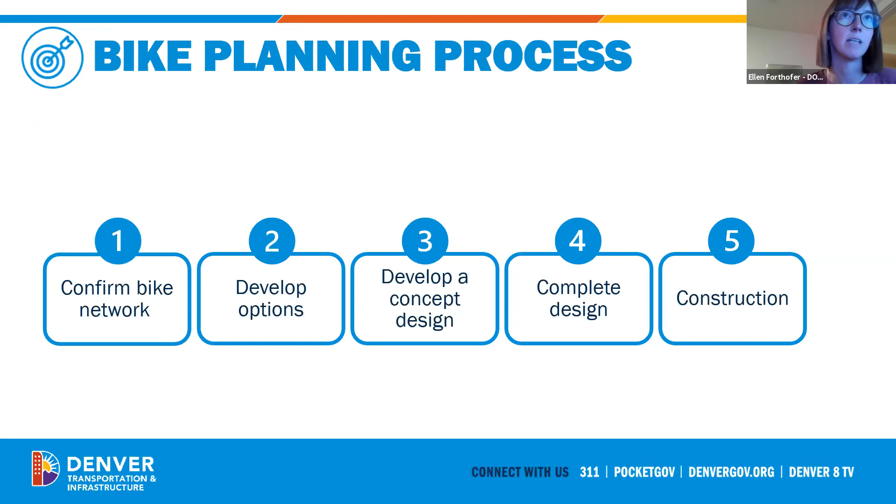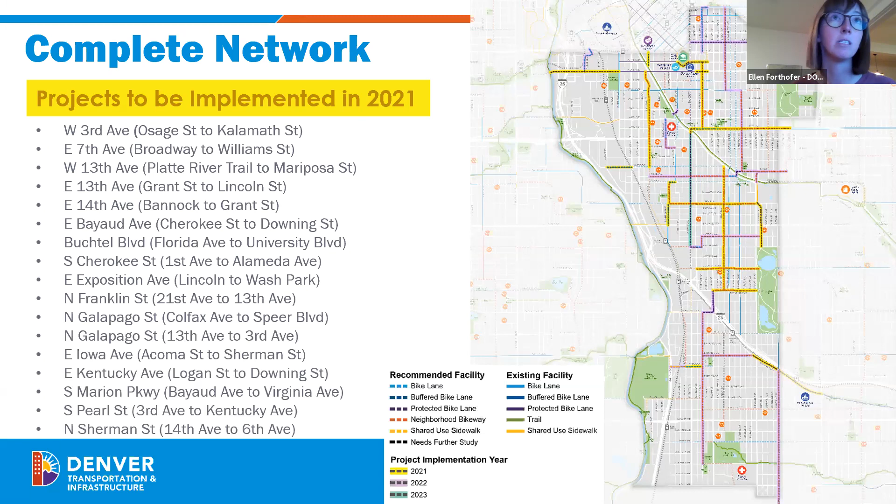The goal here is really to quickly build out these safety improvements that are needed to create that stronger network of connections that align with several of the projects we've talked through tonight. You can see on the map to the right, Broadway multimodal cycle track is highlighted in green, and you can see a lot of these east-west connections we've called out tonight, particularly at 7th to the north, then 2nd Avenue, Virginia, Dakota, and Bayaud. So all of those east-west connections intersect with Broadway cycle track along, but that's a small piece of the larger puzzle of the broader network we'll be implementing through the South Central Community Network.

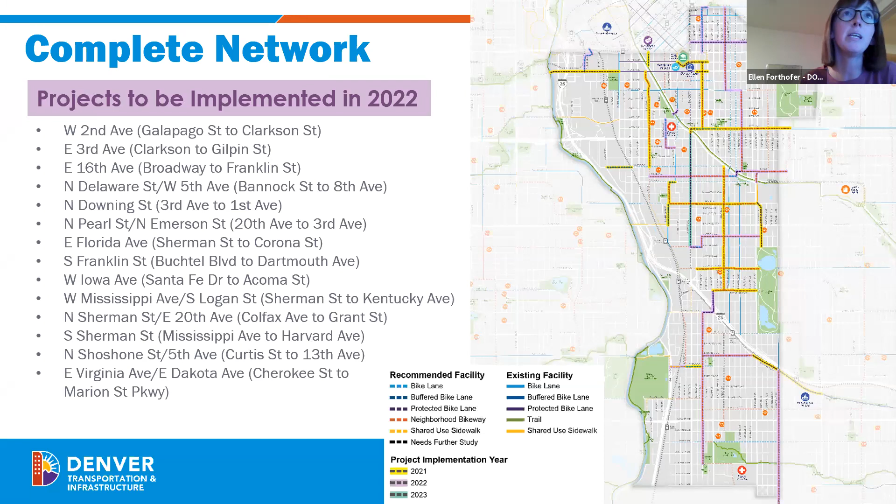On the next slide, I wanted to highlight that we have some phase 2 projects in that concept development stage. You can see those listed here. We do have surveys open and available, open through the end of March as we head towards our next public meeting in April. You'll find those surveys online, as well as updates for the next public meeting as we have them. We're still working on nailing down that exact date, but we'll update our website as soon as we have it. That website is bit.ly/DenverMovesNetworks. You can also see existing conditions reports, FAQs, concept designs and other relevant project materials for all projects, not just those listed on this slide with surveys available. I encourage you to check out that website, especially if there's a certain corridor you're particularly interested in.

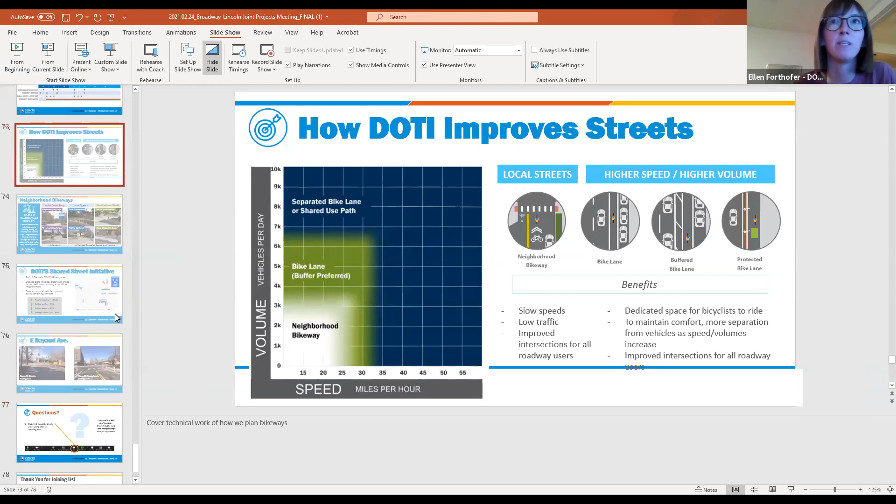DOTI uses a metric of volumes and speeds of vehicles to determine what facility type is most appropriate. For the neighborhood bikeway, we're really looking at targeting low volume, low speed streets and adding design elements to ensure they stay that way—keeping vehicle trips to local trips, and helping the remaining car trips be slower. We're looking at a design threshold of 25 miles per hour or less.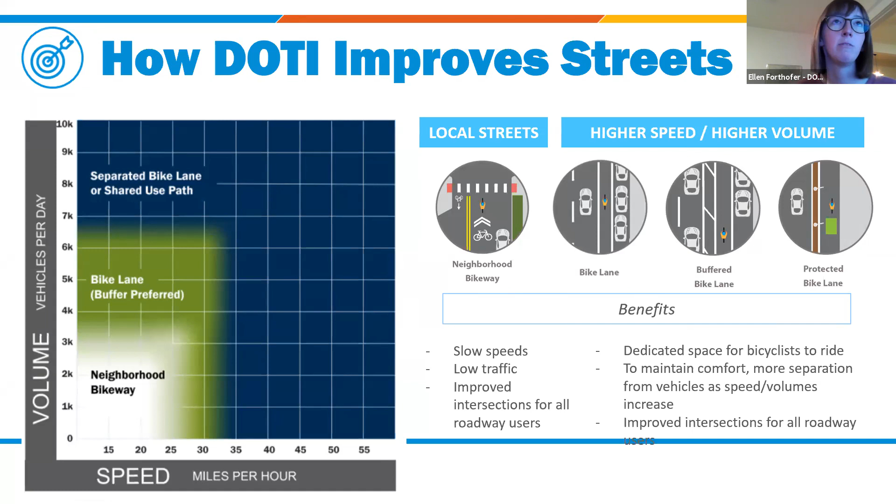On the next slide, you can see some examples of those designs and how we can ensure low volumes of traffic as well as low speeds. Bayard is a really good example of a lot of those tools in the toolbox.

But you'll see things like curb extensions as well as traffic circles, and particularly on Bayard we have two aspects of traffic diversion. That's what helps keep the trips on the street local and reduce cut-through traffic. You can see those at Bayard and Emerson, and Bayard and Lincoln.

So I think to your question, Gabby, yes, it's a good example of a street to bike down and to walk down because it is a shared street—to understand how those design elements work to both slow traffic and keep the trips local.

While I started looking for more questions for the rest of the team for all the projects—Ellen, would you mind talking about the discussion on the chat about making Dakota a shared street? We've also had requests from various neighborhoods about basically moving this forward. Would you mind providing information on what our shared street process is? I know we have limited funding for those, so it's a little bit different. Yeah, it's a great question.

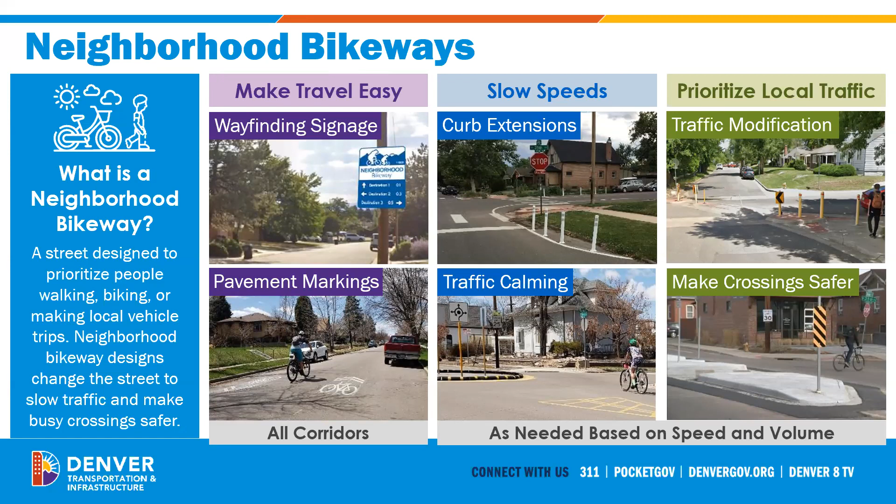An easy question for James: will there be any bike parking planned in the corridor? Currently, we're not planning to add any new bike parking, but all the bike parking that's currently there will be maintained—we'll maintain and relocate it. But obviously we do have the ability, we have... oh shoot, I forgot the name of it.

Our parking, it's like rodeo corrals. Oh my gosh. Thank you, sorry, thank you.

We have our bike corral program for Broadway merchants. If they want an additional one, we have that program where we can figure out where it can be best installed on the corridor itself. We're certainly trying to push that information out there.

Let's jump over and find a question for Mike Harmer about I-25 and Broadway. This is from Gertie: will there be any green growing plantings like trees or even evergreen shrubs added to the project?

Yes, there will be a number of trees added. In the section we're working on along Broadway, a lot of the existing trees are either gone or in bad shape. As part of the project, we're installing longer tree wells and planting new trees, along with street-side stormwater planters that I showed in the Broadway and I-25 presentation. We're including trees and other vegetation in those specific planters.